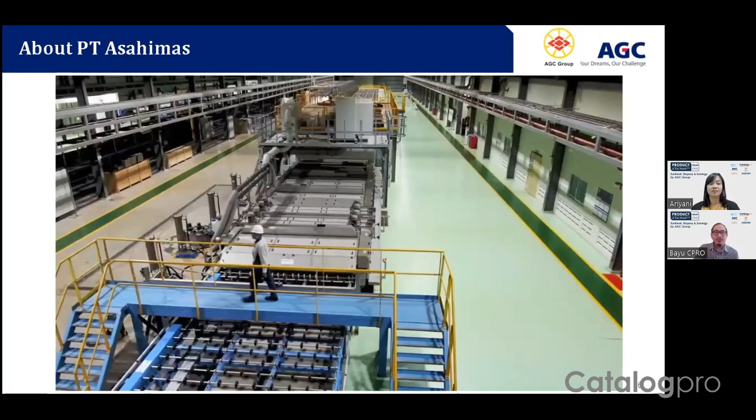Deployed with AGC Interpane European technology, the new magnetron sputtering coating line produces high-performance coated glass sheets.

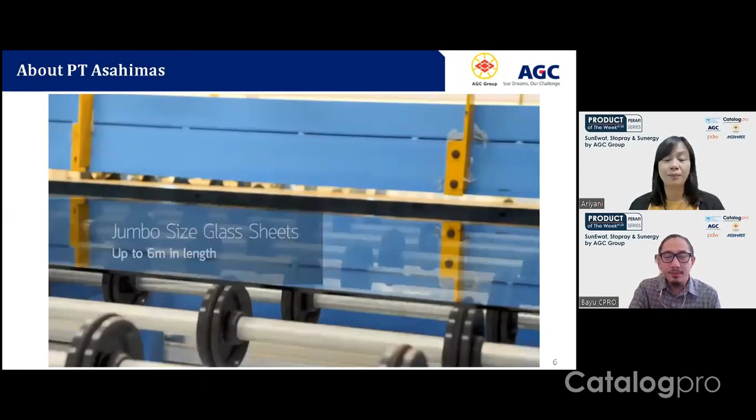Uncompromising quality assurance for our customers.

Our new mirror line features the latest innovative AGC Europe mirror technology deployed in Asia, further enhancing our product portfolio.

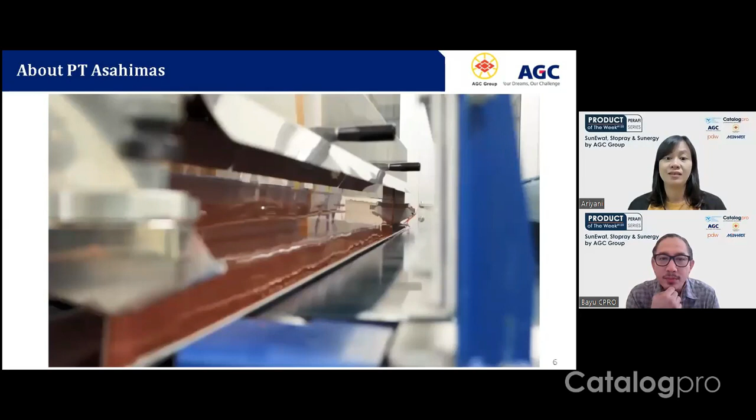Significantly reducing lead in paint layers during the mirror production process.

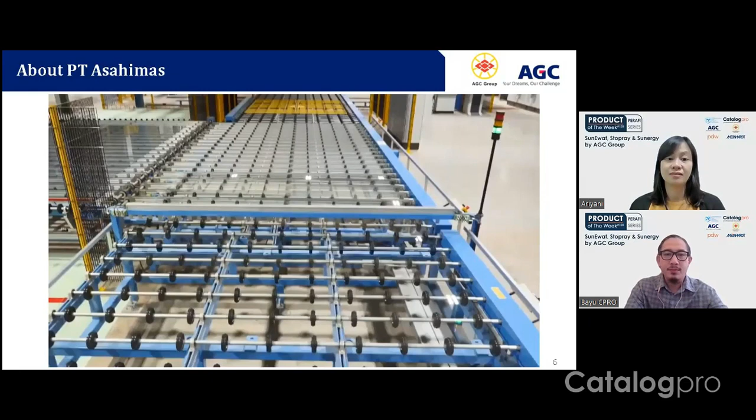In today's architecture and design landscape, buildings and interiors have become more unique, more freeform in design, and driven by sustainability. With our commitment to innovation and strong glass expertise, AGC will continue to be a strategic partner for architects and designers across the region, now and in the future.

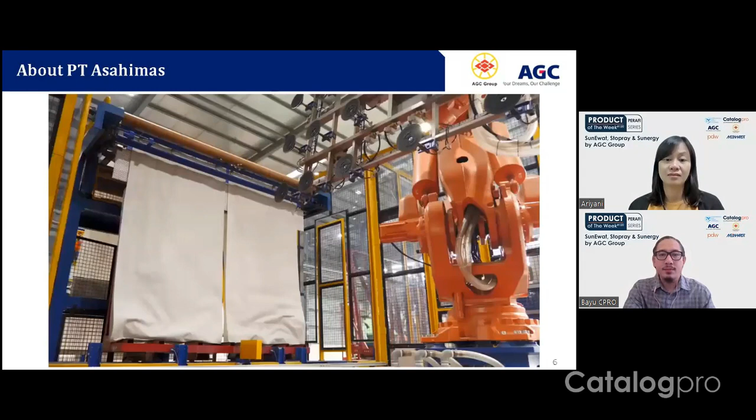Together, let's bring your boldest ideas to life. So your dream, our challenge.

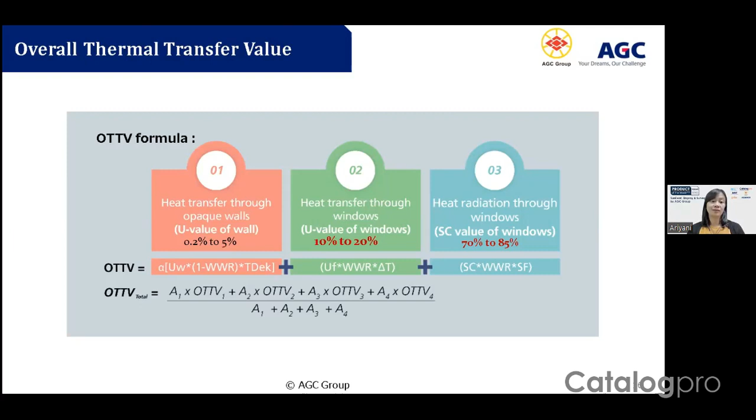Kalau di kaca, parameternya apa? Parameternya itu adalah window to wall ratio, shading coefficient, dan juga U value. Window to wall ratio sendiri apa? Jadi window to wall ratio itu adalah berapa banyak jumlah pemakaian kaca di dalam satu fasad bangunan. Semakin besar, misalnya di 80%, maka kaca yang dibutuhkan adalah kaca dengan performance yang lebih tinggi, sehingga kita bisa memperoleh AC yang optimum. Jadi mengurangi, gimana caranya kita bisa mengurangi konsumsi dari AC.

Mungkin kalau Bapak Ibu pakai kaca biasa, kaca clear, AC-nya masih usaha banget untuk bisa memperoleh suhu yang diinginkan. Biasanya kan kita setel di 24 kalau office ya, dia bekerja keras. Alangkah beda ketika dia memakai kaca yang misalnya double glass, AC-nya nggak terlalu bekerja keras untuk mencapai suhu seperti itu. Jadi bisa dibilang teknologi-teknologi ini bisa lebih menghemat lagi konsumsi listrik ya Bu Ariyani.

Betul, dan juga dengan kaca yang memiliki tingkat transmitten tinggi atau jumlah cahaya yang masuk ke dalam, ini bisa menolong bagi pemilik bangunan untuk meminimasi lampu pada siang hari. Ketika gedung kita udah berasa terang, mungkin kita nggak perlu nyalain lagi lampu dari dalam, Pak.

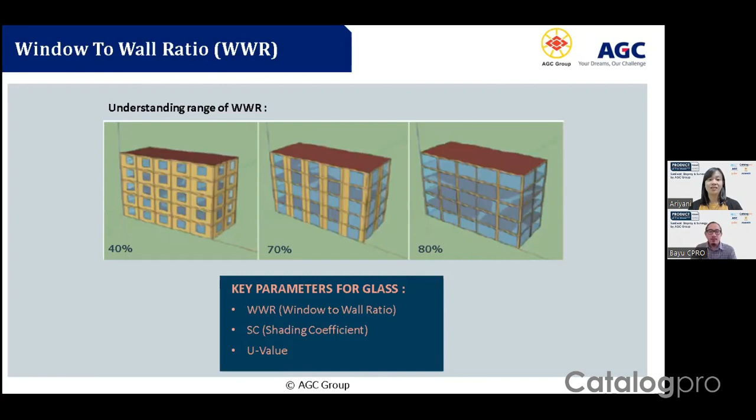Kali ini saya mau bahas produk Asahi yang low E. Kenapa low E? Karena low E ini membantu untuk mengurangi nilai dari OTTV tersebut.

Salah satu kaca low E yang kita punya adalah Sunergy. Sanergy ini apa sih? Jadi Sunergy ini sebenarnya adalah kaca solar control low E kita. Ini dia online low E.

Artinya apa sih? Kadang orang mikir, lagi musimnya WFH kok bahasnya online sama offline. Nah, online itu sebenarnya kalau di kaca adalah mengacu ke proses. Jadi kaca itu dilebur pada suhu 1600 derajat, terus didinginkan mengikuti dari tungkunya. Jadi ketika 1600 itu pasir silika dan dolomit dilebur jadi satu, diambangkan di timah panas. Makanya semua kaca itu namanya float glass. Dia mengalir sampai nanti keluar dari tungku, sesuai dengan suhu ruang.

Cuman kalau untuk kaca-kaca online coating, online low E, artinya apa? Pada saat di tungku dengan suhu 700 sampai 800 derajat, dia di coating. Sehingga coatingnya itu akan lebih awet atau durability-nya lebih tinggi. Kenapa? Karena dia menyatu dengan kaca.

Kelebihannya kaca Sunergy itu apa? Jadi Sunergy ini adalah kaca kita dengan low reflektif dan transmittennya tinggi. Selain itu dia dapat berdiri sebagai kaca tunggal. Memang kalau kaca-kaca seperti ini, kalau kita lihat tren dari arsitek, lebih banyak cocok untuk residensial seperti apartemen atau rumah. Tapi memang ada beberapa yang menggabungkan ke office dengan ditambahkan kaca kedua yang bisa membantu mengupgrade lagi performance-nya.

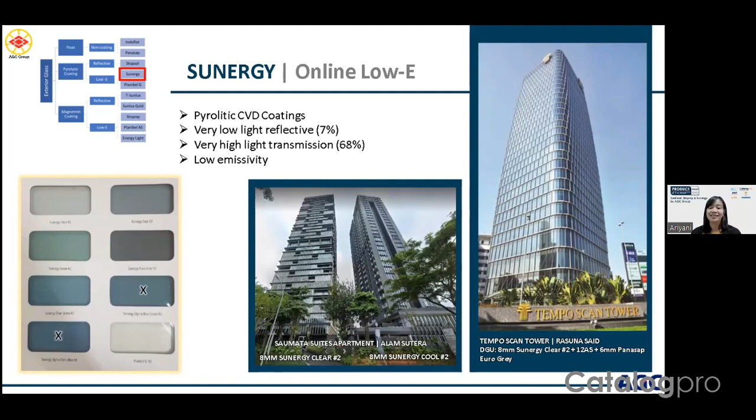Jadi nggak boleh kebalik, reflektivitasnya rendah ya Bu ya? Karena di perizinan kita diminta ada ketentuan tertentu untuk refleksi. Jadi itu salah satu keunggulan kaca low E. Betul Pak, jadi kaca low E Sunergy ini reflektifnya di bawah 10%, Pak Tio. Jadi aman.

Ini beberapa project reference kita seperti Alliance Tower, Saumata Tower, 88 Avenue Jakarta, SS Tower Jakarta, dan juga Lipo Holland Village, The Smith, dan juga untuk hospital Mayapada Lebak Bulus, dan masih banyak lagi. Sebenarnya kenapa kita nggak cantumin semua, karena tiap kita foto kita harus izin dulu sama yang punya, jadi biar tidak ada salah paham.

Bu Aryani, mungkin saya sedikit bertanya. Boleh, hal simpel tadi Bu. Pak Bayu sempat sampaikan jangan sampai salah mana yang bagian depan, mana yang belakang. Pada saat ada kebutuhan, ada inquiry, pada saat pengiriman itu ada petunjuknya nggak sih Bu? Ini sebenarnya bagian depan, ini bagian belakang gitu.

Oke, biasanya itu kita ada stiker Pak. Kalau dealer kirim, kalau kita anggap kirimnya dia single glass, biasanya dia di kaca depan. Nah, coatingnya itu biasanya di belakang kaca. Jadi si stiker ini nggak nempel ke kaca. Tapi kalau dari logo marking, biasanya kalau kaca-kaca tempered atau heat strengthened ada logo markingnya. Logo marking itu biasanya yang bisa kebaca dari depan, tapi dia nempelnya di coating justru.

Oke, saya lanjut ke produk Stopray. Jadi kalau Stopray ini apalagi sih? Tadi kan udah ada online, ini kok offline gitu kan. Nah, kalau offline itu dia beda.

Kalau online, dia di coating pada saat masih dalam proses tungku. Kalau ini enggak, jadi kalau offline itu kacanya udah jadi duluan, kemudian di lini produksi yang berbeda baru kita coating. Cuman jangan khawatir, semua produk offline Asahi akan di-coating pada saat fresh production. Kenapa? Karena kita ingin memberikan kualitas terbaik, sehingga ketika fresh production akan terhindar dari debu-debu yang ada di ruangan, sehingga hasil coatingnya lebih maksimal.

Dan juga Stopray ini sebenarnya awalnya memang dari Eropa. Teknologi ini kita bawa ke Indonesia, kita lihat market juga.

Jadi ini sebenarnya adalah kaca yang saya bilang mungkin owner dan arsitek itu mengharapkan cahaya bisa banyak masuk ke dalam. Reflektifnya nggak terlalu reflektif, tapi nggak pengen panas. Tapi kalau kita lihat ke zaman dahulu, biasanya kalau mau nggak panas, caranya cuma ada dua: pertama kacanya direflektifkan sekali sampai silau, kedua kacanya harus gelap banget. Nah, kita kan nggak mau kayak gitu.

Nah, Stopray itu menjawab pertanyaan itu. Jadi secara transmittance, dia gede, bisa di atas 30% ke atas. Secara reflektif pun, dia nggak terlalu reflektif, jadi masih di bawah 24 untuk out. Dan juga reflection internal, kan kita nggak mau terlalu ngaca, jadi ini masih di bawah 15-16%.

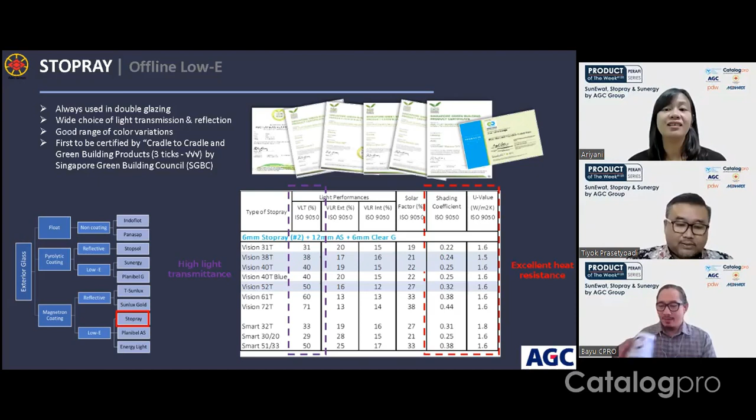Makasih banyak. Dan juga secara green seperti apa? Jangan khawatir, untuk sertifikat green kita udah dapat semua untuk kaca Stopray ini.

Nah, ini untuk beberapa project yang sudah kita kerjakan dengan Stopray. Contohnya seperti PIM 3 dan Pondok Indah Office Tower 5, Wisma Barito Pasifik 2, 57 Promenade, MTH 27, Hasanuddin Airport, Mandaya Royal Hospital, dan juga Kejagung RI. Ada Terembesi Tower, kita pakai 3 jenis Stopray, makanya warnanya agak variatif.

Nah, apa sih yang dapat Asahi Mas tawarkan? Karena kita kaca lokal, maka kita menawarkan supply time dan juga glass replacement yang lebih capable. Secara supply, jangan khawatir, karena kita di lokal pasti lebih cepat, lebih faster, dan nggak usah nunggu satu kontainer dibandingkan kalau kita impor.

Nah, kalau secara glass maintenance seperti apa? Jadinya kalau misalnya di lokal, kita nggak perlu stok. Cuma bedanya gini, kalau untuk kaca-kaca offline, kita produksi itu tiap 2-3 bulan sekali. Kalau untuk kaca online, kita 2 kali dalam setahun. Jadi jangan khawatir stoknya nggak ada, pasti ada untuk maintenance.

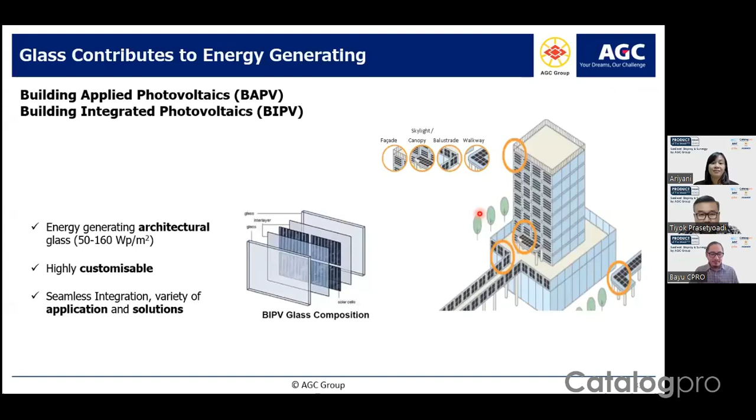Nah, Mas Bayu, saya jadi ada pertanyaan ke Bu Aryani juga. Tadi sempat disinggung beberapa kali warna gitu Bu. Kira-kira kalau untuk AGC sendiri, disediakan berapa warna Bu untuk tipe kacanya?

Untuk beberapa tipe kaca tuh memang ada beberapa Bu. Contohnya untuk online itu kita misalnya punya Sunergy, itu kita punya beberapa warna seperti blue green, green, Euro grey, cool, dan clear. Nah, cuman untuk kaca-kaca seperti offline tuh kita udah punya banyak varian seperti reflektif kita seperti T-Sunlux, itu kita udah punya warna yang terbaru itu gold sama bronze.

Nah, kalau untuk Stopray ini kita memang untuk saat ini kita konsen ke warna netral. Kenapa kita konsen ke warna netral? Karena warna ini nggak bosen, tidak membosankan lah seperti itu.

Nah, memang kelebihannya, maksudnya gini, jadi memang tiap company itu ada satu decision warna apa yang ingin diambil. Khusus untuk Asahi Mas, memang kita mengambil warna standar dulu. Kenapa? Ini memudahkan kita untuk replacement ke depan.

Jadi ketika memang terlalu banyak warna, takutnya ini nggak bisa masuk ke sistem, jadi ketika penggantian itu agak susah. Nah, ini kita coba untuk warna yang offline itu seperti Stopray, kita coba di warna netral dulu, seperti itu.

Oke, terima kasih Bu Aryani. Iya, biar gedungnya nggak bolong-bolong gitu lah Bu, belang-belang gitu ya Bu ya. Iya, ketika pecah jadi nggak pusing. Iya, jadi kalau pada saat maintenance nggak ribet ya Bu, jaga-jaganya. Betul. Oke, terima kasih Bu Aryani dan Pak Tio, Pak Tim.

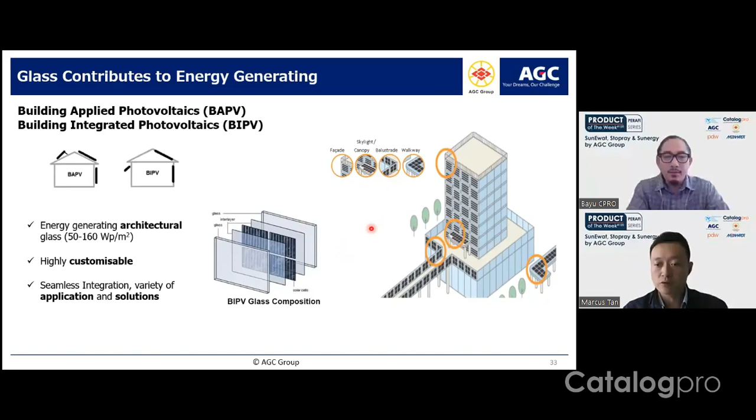Many different kinds of applications. So basically, we have four different BIPV or BAPV ranges. We call them SunEwat Square and SunEwat Stripe, which are our transparent solutions. And we also have opaque solutions called Stopray Active and Arclight Active.

Transparent solutions are those that let light come in or allow you to see through, and the most efficient is this SunEwat Square. It can be applied on your canopy, skylight, or even a double skin. For example, on the right, this is the Hikari project, the first positive energy building in France, which uses SunEwat Stripe on the second skin. Typical output is about 50 to 160 watt peak, depending on panel customization, and the solar cell solution can go within this range.

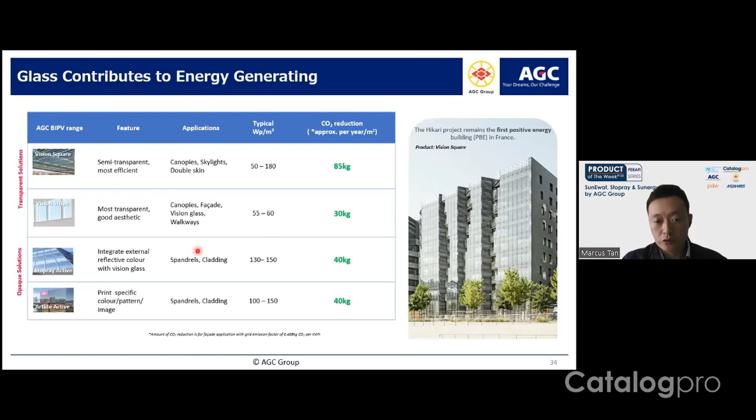If you're looking for better transparency, we have Vision Stripe, which is the most transparent solution we currently have. However, the trade-off is that the power per watt peak per meter square is slightly less compared to the first one. If you want opaque solutions with a good color range and different products, we have Stopray Active, usually used on spandrels and cladding, typically 130 to 150 watt peak per meter square. And if you want many designs, colors, patterns, or images, we have Artlite Active, which gives architects a good range of ideas and can be applied on spandrels, logos, cladding, anywhere you like.

I will show you more project references later.

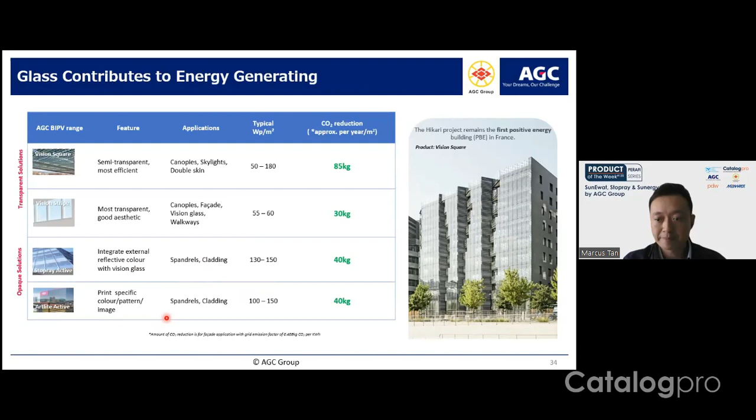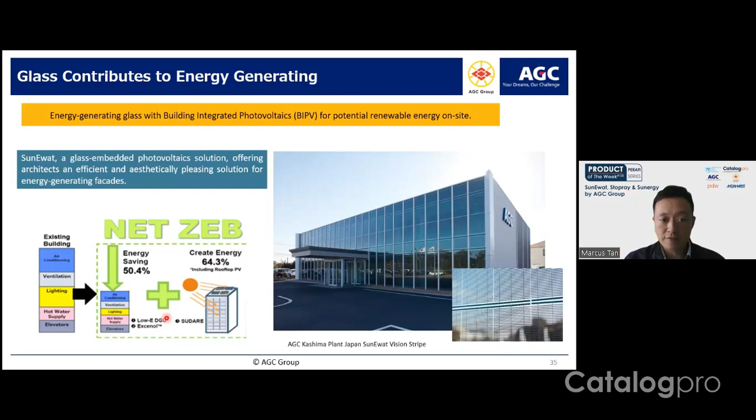So first, let's look at why these energy generating glass with BIPV are looking towards potential renewable energy on site. This is glass embedded photovoltaic, offering architects a very efficient and aesthetically pleasing solution for an energy generating facade.

On the right is one of the projects at the AGC Kashima plant in Japan, manufactured since 2018. On the rooftop they're using conventional PV. However, to reach net zero, they needed a positive kind of energy for this project, so they used energy saving products like Stopray, lightings, ventilations, and Low-E DGU, but they still needed additional power.

Hey Marcus, sorry to interrupt your presentation. So this product is like a solar panel, but we can put it in the glass, right? Yes, this is one of the products from AGC.

So this is actually a product where the Vision Square is laser cut and becomes a stripe. The cell is square by square, and then it's laser cut and becomes a very thin line. We can customize and request from AGC what kind of pattern we can put in the glass—AGC already has patterns available in these products, Marcus. For this particular product, unfortunately, it's Vision Stripe, where you won't be able to have any kind of patterns or designs. But we have another product called Artlite Active, where in terms of architects, patterns and design, you can have anything placed into the glass itself.

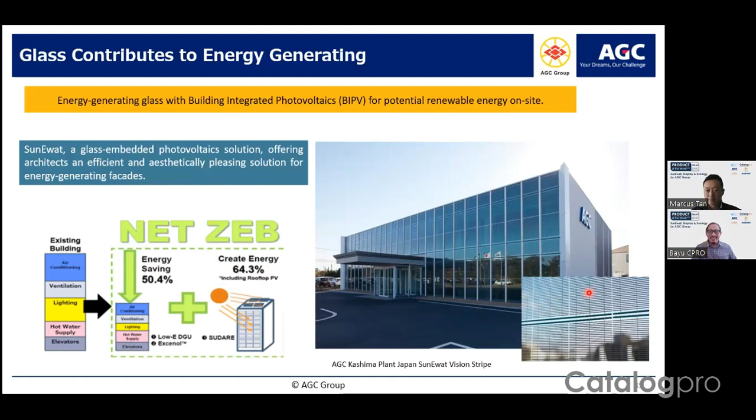Another example of this energy generating glass is a project reference in Singapore, Dulwich College. We are using Vision Square on the skylight and also on the facade fins. On the skylight, AGC is able to customize and have different densities of the product itself.

For example, in this project they wanted plants to grow on the side of the building or the side of the skylight, and on that area they wanted more light to come in. Therefore, on other places we designed and gave them ideas to use a more dense product able to generate more energy.

And on the side whereby they want to grow plants, we have this open area with lighter or less density, so more light comes in for the plants to grow. Our team also gives a good design on the fins area, whereby the angle of the fins is trying to maximize solar irradiation or solar power, so it doesn't create shading to the next one. So all these are some services or ideas that our team in Singapore can propose, to assist architects, owners and designers to share with their team and propose using our products. So there is lots of play, any kind of play that architects or developers would like to have.

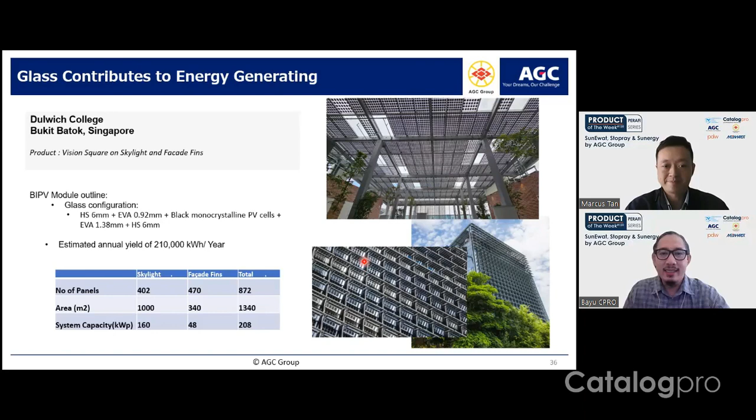Another project we have in KL, Kuala Lumpur, Malaysia, is this PNB118. It's used on the area below here, looking at 1050, and also using glass combinations of low iron, 8mm and also 6mm, generating about 125 kilowatt peak.

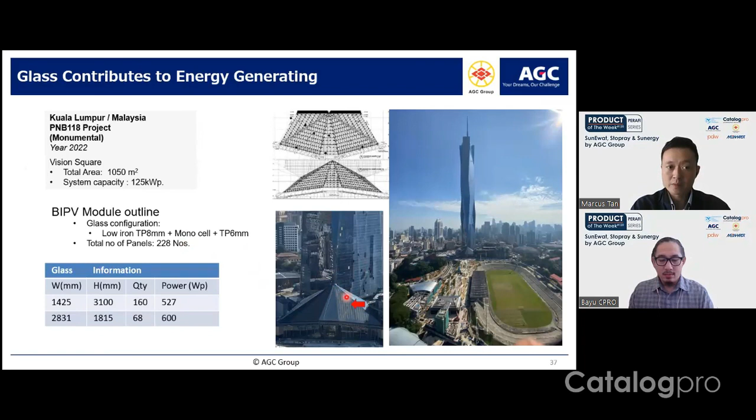Oh, this is quite interesting. We can create like any image for these solar panels, right? Yes, any image, any designs, any patterns, and also any logos that you want. For the colors, we can request it too. Yes, any colors that you want. Wow.

We also have many other projects, like for example this one using canopies. Part of the building uses it, and they wanted to have light come in to create a brighter walkway. During different times of the day, the patterns of the square shapes actually move with the sun, creating different patterns during the day. This is another example of using Artlite Active. The public may not know, without more information, that they thought this was just a light bulb to enhance the inside of the building. However, this is also a good energy-generating design for the car park itself in this instance.

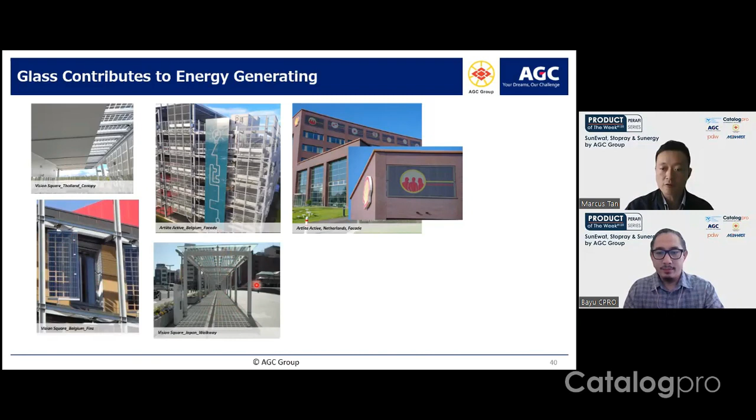We also have projects using the walkway itself. During the daytime it can harvest energy, and at night it can light up the walkway for passengers or people to walk. We're also able to have modules like this where on top you can still gather or view the outside view, and below the glass is energy generating. This project is actually using a bifacial kind of cell, meaning that from this side or the other side you're able to harvest light as well. So bifacial, with two sides of the solar cells, is able to generate electricity. It can also be used as a noise barrier, which is one project we have in Japan.

So basically for SunEwat, we need to have the whole system. Actually, we need three main parties to be involved. First is the module supplier, like us or AGC, the glass manufacturing supplier for this instance, providing the SunEwat which includes the solar cells in between the glass.

And then we will need module installers, probably your facade contractor or general contractor, which will attach the glass to the frame and make the system watertight, following local regulations for installers. Then in terms of the energy or electricity part, we will need a full system, a BOS or system integrator to do the installations on the inverters and other components of the project.

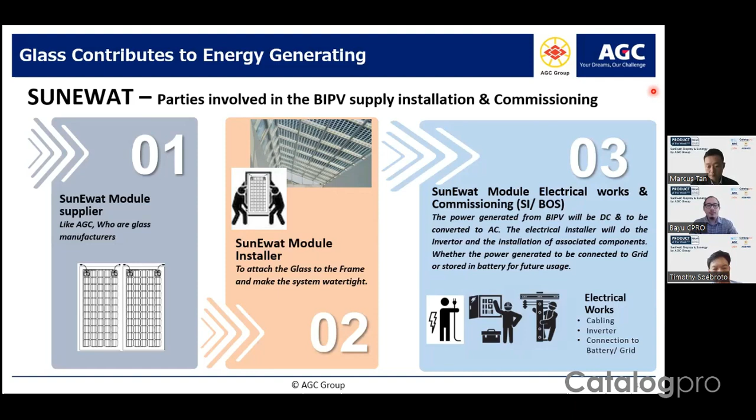Okay, so like what Pak Tim has shared, in terms of efficiency or watt peak, of course the Vision Square will be higher efficiency. And if you look at the stripe, because more light is coming in, the stripe is unable to get as much power compared with the Vision Square, so you can see the watt peak is almost slightly lower.

And like Pak Tim also mentioned, if you have a bit of color coming in, or even patterns of design, typically the power generation or efficiency will get slightly lower. However, if the result is that on the top surface you have something that will not be able to absorb the whole of this power coming in—so if you compare these solar cells, we are actually using the same solar cells as conventional PV, our product is just slightly lower than those conventional solar cells.

It's due to the first layer for BIPV also using glass, but for conventional ones it's actually a very thin piece of glass. So these are some reasons why the efficiency is slightly lower compared with conventional, yeah, slightly drop. But I think the efficiency is considered quite high compared to 5 or 10 years back, right Marcus?

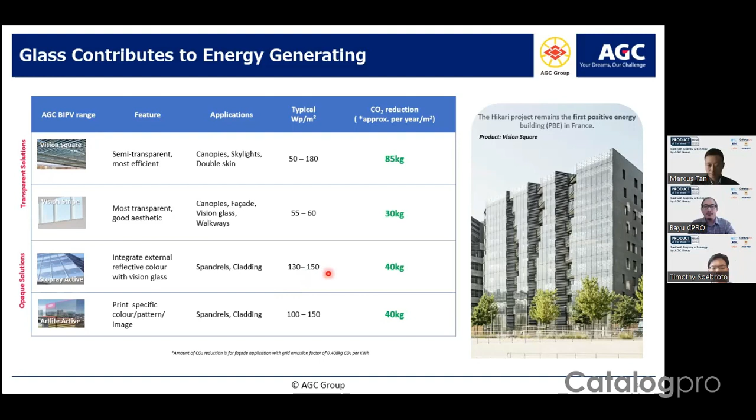Am I correct, Marcus? Last time when we saw solar cells, we would think negatively, that the solar cell would provide negative impact to the building in terms of aesthetics, right?

Yeah, but I think AGC developed it nicely, so this one is very impressive, and it gives freedom to the architect to design, actually.

I'm just curious about the time period to change the solar panels. Do you have any suggestion about when we must change the solar panels, or is this the lifetime of solar panels to put in the buildings, Marcus?

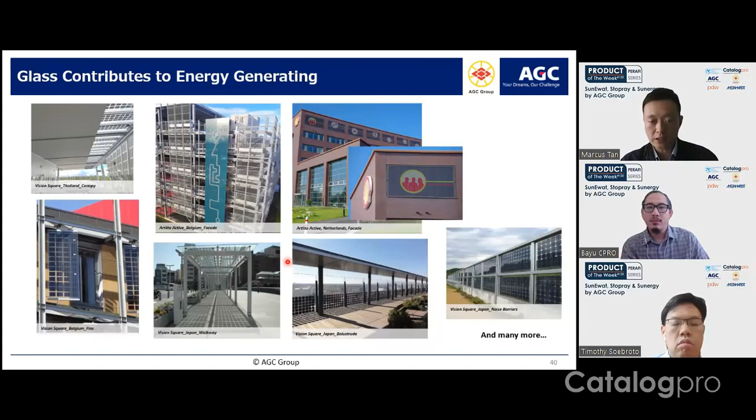So basically, the warranty of the lifetime of these kinds of solar panels can go 20 years or even beyond. For AGC, we are looking at giving this power generating performance for up to 20 years. The first 10 years is 90% power energy generating, and then the next 10 years is like 80% of the power able to generate.

And of course, if you want a longer period, we go case by case and project by project, and we are able to offer this as well.

So for special patterns like this, is there any additional charge to the owners, or can we just create any designs, Marcus? Yeah, you can create any designs, there's no fixed thing.

And of course, if you are looking at patterns compared with transparent ones, the pattern ones will actually be slightly more, because you need to have the design come out.

Okay, interesting. Okay, please continue your presentation, Marcus.

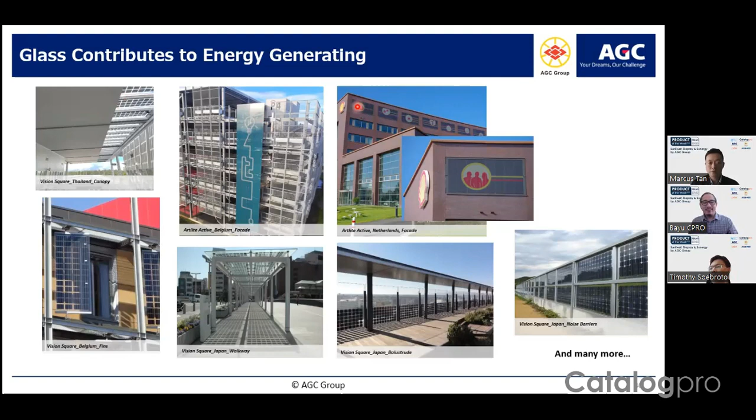So for us at AGC, like what Mr. Timothy mentioned, we are able to do sun path simulations, as the rooftop actually generates the highest energy. However, if we know the sun path, we are able to assist architects or developers to do designs to see how we can incorporate the facade area to generate more solar energy.

With module efficiency, it depends on what you want or like. For example, you may want designs where all the modules are paired closely together, or you want more light to come in, so the spacing between each panel is slightly bigger. These are all customizations we are able to do.

And being a glass company, we are also able to provide SC value, U value, and light transmission properties, like what Ariani mentioned, to show developers, owners, architects and contractors that these are the products being used or specified for the project, to assist them with all these specifications. So I think that's all we have to present for our session.

So if you want more information or have any inquiries, you can contact me or Ariani, and we will try our best to reply to these inquiries.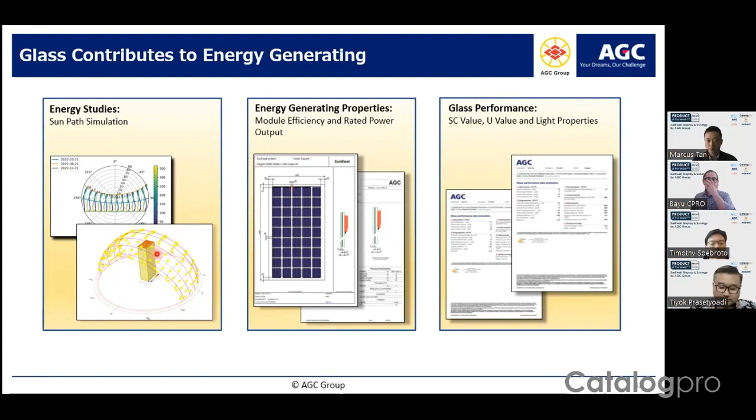This is my last question for you, Marcus. So when our participants or architects in Indonesia need these products, should they direct call you or Aryani first, and then contact you, Marcus? Both the same, right?